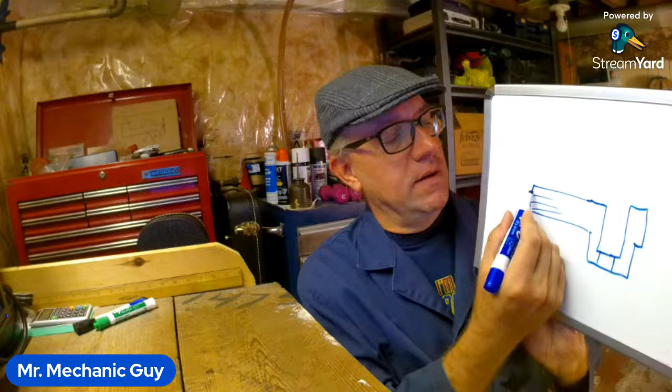Let's see, get the old whiteboard out here. It didn't really look like too much. It looked kind of like that. Big deal. But it had a spline on here so you could put the propeller on there, and it had all these little holes in it at weird angles and everything.

And this part down here had to be ground. You had to fit this thing - if you ever see any outside diameter, OD grinders, it's for making a shaft very precise around the circle of that shaft. They had this big OD grinder, and you had to put weird counterweights on it so that it could rotate around this shaft. So this whole thing was going around, and you had a counterweight over here, and the whole thing was all going around - it was really weird to watch. This was actually pretty deep in here too, so it was a huge grinding wheel, and it went really deep in there. It was really something to see.

And the guy that worked on that, his name was Julie - but don't make fun of his name, because it was actually short for Julius, and everyone called him Julie. He was the most senior machinist in the shop, and he got to work on the trickiest, most fussy part. He had all these jigs and fixtures made up so you could drill some weird angle all the way through, with big long drills that are really skinny. Julie was a very good machinist. So that was the crankshaft that they made.

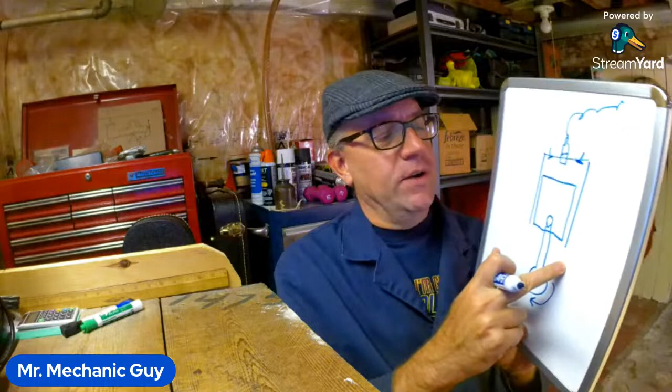And so that's how it works, and then in your regular car you might have 4 of these in a row going around this little shaft and making your car go. So what's that got to do with radial engines? Now that's the weird thing there.

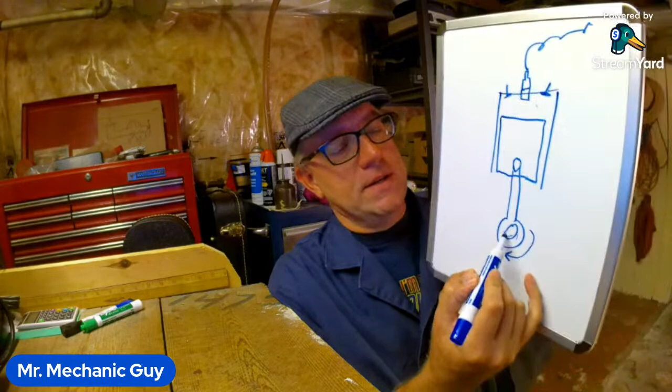For your radial engine, you would have something - now because this little guy has to... okay, for a regular engine, this thing here doesn't move around, okay? And that's attached to, I guess, your transmission or something like that. But now for a radial engine, they'll have...

One of these guys. And how would we do this here now? So we've got this, this will go - how do we do that now? So you have a rod coming down here like that. How would you do that? There's a round one - oh yeah, here we go. So we got, that might be hard to explain. Okay, well basically, never tried this before, explaining it. So we got something, maybe it looks like this.

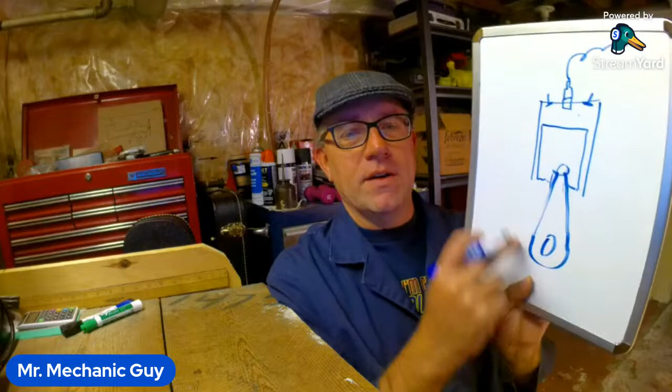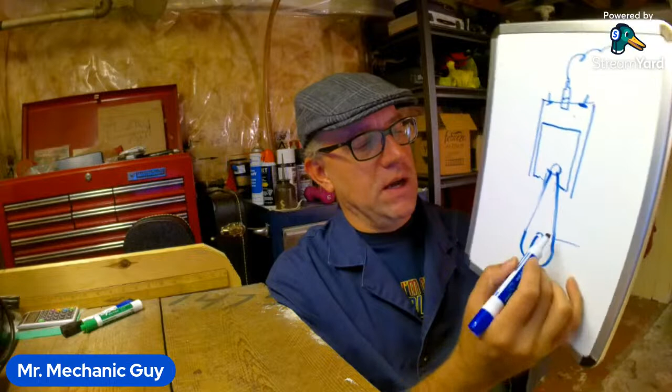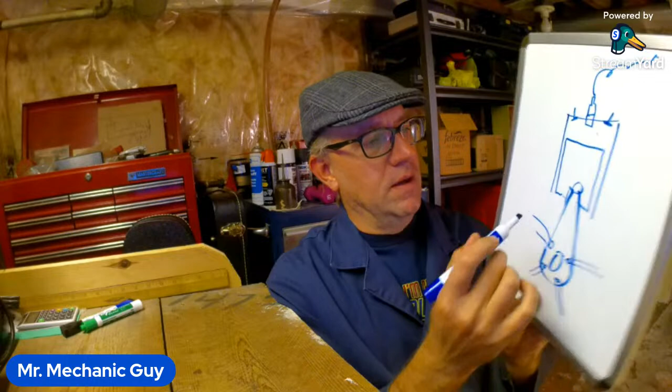And so this little guy here is just going to move up and down, and this guy here is going to be kind of moving around and around. And then you'll have other pistons coming off here like this - they'll have the main one on this one main shaft, and then smaller ones connected over here. They all kind of do the same thing. So say this is for a 5-cylinder engine - you got 1, 2, 3, 4, 5. And as these are going up and down, these are going in and out.

And this is where I'm going to show you the cool animation. Okay, let's see if I can do my interesting little... okay, what do we got here? I'm going to show you a couple of these. All right, here we go, let's see if I can do this. All right, now we are going to have - this is your moving engine. So that's what it looks like for a radial engine when it's going up and down and all around.

So how do we do this here now? Yeah, so we got this main guy here - this is your main, I guess would be connecting rod here. So you can kind of see this guy here, that goes right around that main shaft that I showed you, that one thing that was ground, the main crankshaft. And then the other little ones, they're going off the side - little guys going off the side like this.

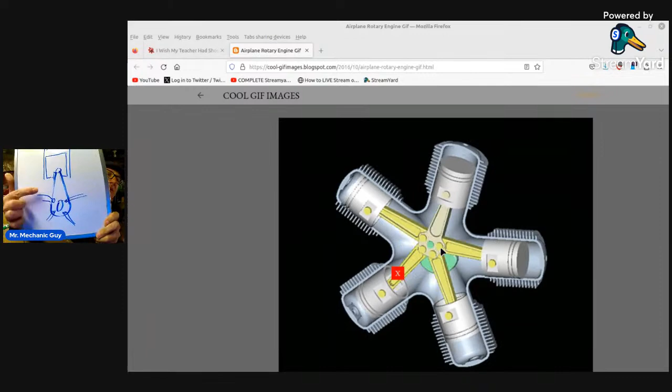So that's these other little guys, like over here, down here, over here, and that one. So that's how the radial engine kind of works.

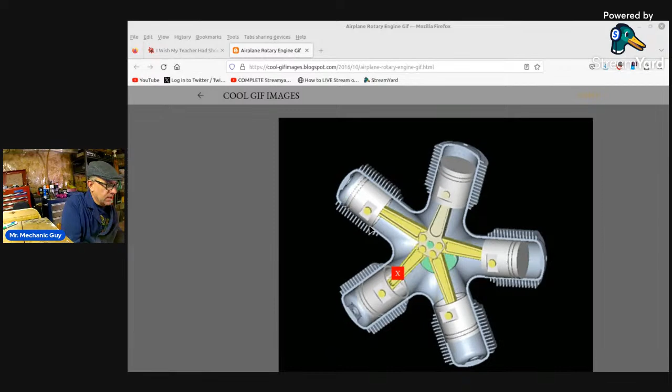And one of the cool things I saw before they came out with this design here, they had it set up so instead of this thing all jiggling around and dancing around like that.

Oh, hey Shecky, hey Jordan. So what else we got here?

Yeah, so I saw when I was at the Air Force Museum in Dayton, Ohio, they had the old pre-World War I radial engine, and instead of just the pistons going up and down and moving one little crankshaft, all the pistons went around. They attached the propeller right to all the pistons, to the outside, and everything all turned around. So you can imagine how much momentum is going around there. You'd have to use a whole lot of rudder, that's for sure, to be flying that one.

So that is roughly how it works. And all the timing of this stuff was operated by basically one round cam that operates all the lifters and everything like that, for the exhaust and intake valves and spark and all that other fun stuff. So that's how it works.

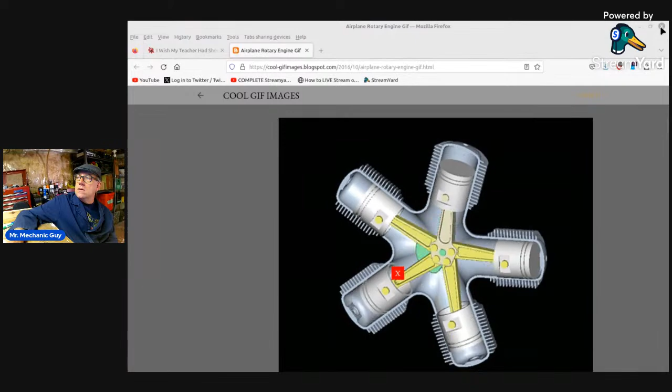So, oh hey Shecky, am I still getting popping on the mic? Oh man, that's a bummer. Okay, you know what I'm gonna do? I'm just gonna shut this down here. Yeah, so I'm kind of experimenting with all this double screen stuff, and no one else here is popping, I don't know, I was checking. That's one thing - yesterday I re-listened to the show and it sounded like my voice was kind of overdriving the mic, and I thought maybe I don't know if my little connection is bad, if it's a bad connection on the wire or something like that. I have a backup wire. Anyways, I'll have to figure out some other stuff.

And hey Al, good to see you here too. All right, so that's how that works.

And I was going to show you something else here. Oh yeah, and then I was also thinking when I was in college, there was a bonus question. Okay, that's my rough explanation on how the radial engine works.

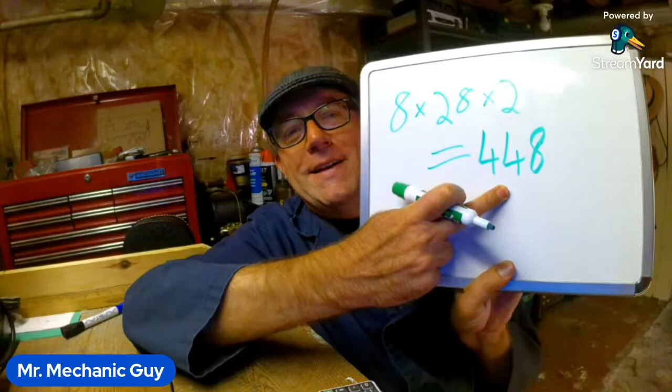So we go 8 times 28 times 2. Okay, so the answer is - and I got this totally wrong back in college - how many spark plugs does the Spruce Goose have? 448 spark plugs. How would you like to change that? Yeah, so they had 8, 28-cylinder engines. And so what you can do with a radial engine is you can just have...

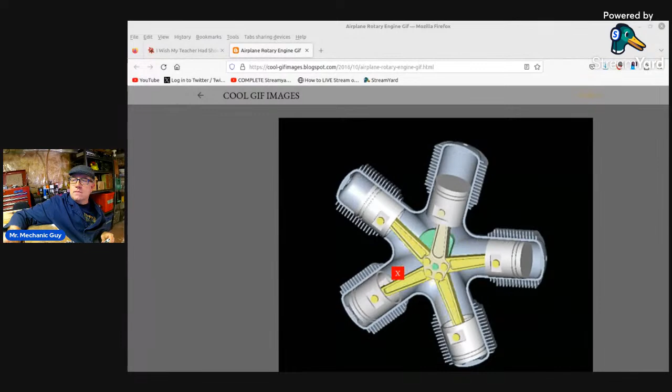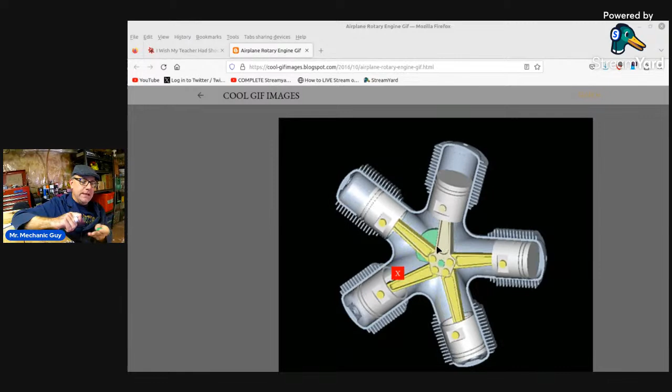I'll kind of bring this back here. So what we got is this here, 5. What you can do is stack them together. So instead of having one layer of these 5, stack them together and you got a 10-cylinder engine now. Stick another one on there, now you got a 15-cylinder engine, and so on and so forth. So I guess a 28, what would that be?

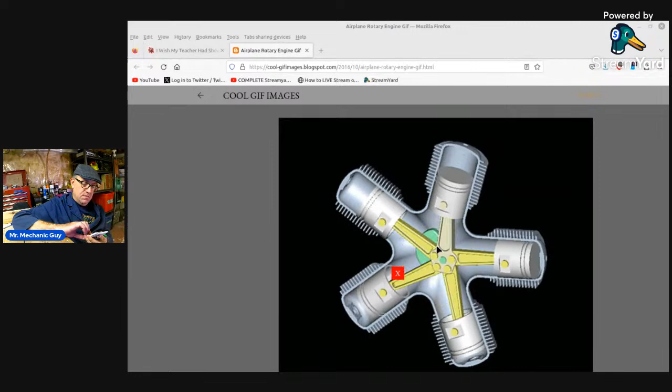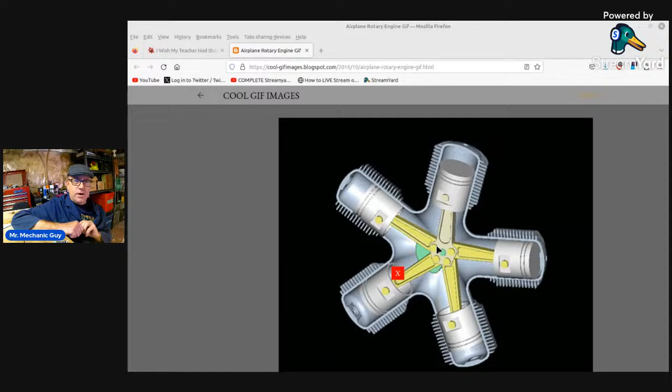How many would that be? 28 divided by 9... maybe a 9-cylinder engine. Wait, no, what's my math here? 28 divided by 7 cylinders, maybe? Oh yeah, so that would be it. So if they had 4 rows of 7-cylinder engines, that'd be a 28-cylinder engine. So 448 spark plugs if you wanted to do a spark plug change on your Spruce Goose.

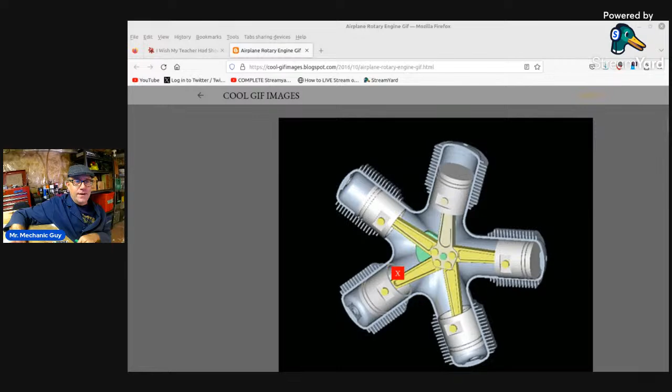So needless to say, they didn't put that into commercial production during World War II. Yep, there you go. Shecky got it there too. Shecky's doing the math here: 56 times 8 minus 400. Wait a minute, that's not my math. So anyways, that's one way of doing things, I guess. I didn't even do that. Yeah, so there we go. That is a whole lot of spark plugs on that plane.

Okay, so that is about it here. I'll go through and see if there's any questions or anything like that. It seems to me I saw a few pop in here. What's this?

So Wrench is saying here, there's an air show in Kansas City that has an old round engine helicopter, Vietnam era. I don't really know, I guess you could have that.

Yeah, and that's another thing to mention too for these radial engines is that they're all air cooled, and most engines out there that are airplane engines are air cooled. Like the Volkswagen Beetle, the original old one, it had an air-cooled engine, and that was originally an aircraft engine. So good old Mr. Hitler decided, or Dr. Porsche, whoever was in charge, said okay let's take this aircraft engine and put it in the little car, and it's less production cost if it's air-cooled, and it's lighter if it's air-cooled. So that's kind of why airplanes have air-cooled engines generally. Some don't, like you got your Mustangs and Spitfires and all those cool planes, they're water cooled or antifreeze cooled, liquid cooled.